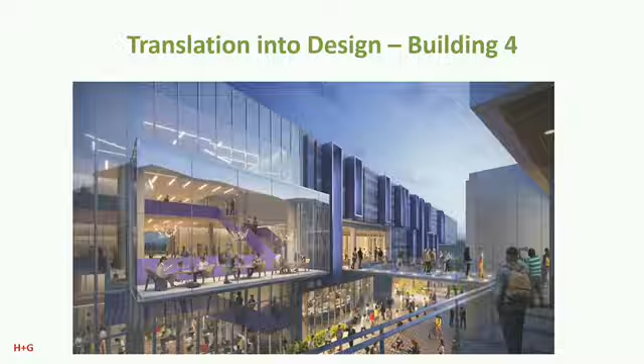I'd like to pause here and see if we've captured what your thoughts are on accessibility. We're going to spend the bulk of our day on the sustainability issues because of the technical nature of those, but if there's any discussion that the group would like to have, I'd encourage that now.

Yeah, and as you're considering that, I want to punctuate related to accessibility being deliberate in terms of an inclusion objective - specifically, student input and student surveys have gone into this consideration. What we heard from students as it relates to what they'd like to see in design are open, accessible, and that they feel comfortable. What we may feel comfortable in, they may not feel comfortable in. So there was a great deal uncovered, if you will, engaging the students' input as to how do they want to negotiate the campuses, what comfort level do they have, and what would they like to see as it relates to satisfying being open, being accessible, and for them feeling comfortable.

This is Teresa. Good morning. Okay, I'm sorry, no go ahead Teresa. I was going to ask a question, but you go ahead. Okay, no, I thank you for that.

Michael, Chancellor, I just had a quick question on that. You talked about it's been an inclusive approach and we've been getting feedback from students. Have we also tapped into those students that have special needs to make sure that this is equitable as well? Because one of the things I looked at is just visually, you see some of those areas are at different levels. So we want to make sure that if a student has some sort of special needs, they're able to feel included as well. Can you talk a little bit about how we reached out to those communities as well?

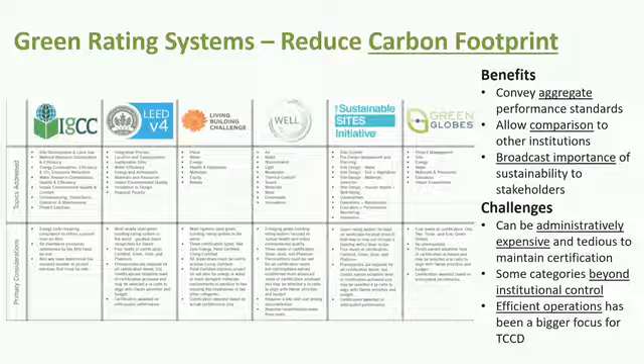I'll share with you that they divide the scorecard up, and we'll focus on LEED just as an example. All of them have varying usage, but they're divided up into these categories in terms of areas to focus on, and they're broken down. You can see there's an illustration that there's a bunch of different items under each one of those. What our team has been doing is using this to generate discussion around each topic.

And how is it that they're achieving those objectives in the decisions that we're collectively making as well, scoring ourselves to some degree. So as you can see, it's location and transportation, it's whether the site's sustainable, it's how we're dealing with water efficiency, usage of electricity and gas, indoor environmental quality, and so on and so forth. But it's just a framework for us to use that can be consistent across institutions, for us to learn more about ourselves and to make plans for how we're going to develop a particular site.

In addition to that, there's also a statutory framework. Back in 2007 was the first iteration of this, but statewide there was an effort to reduce energy consumption, focused on a narrow sliver of what sustainability means. They adopted rules for state agencies, including higher ed, and guidelines. I don't know that there's a penalty per se, but it was a goal of reducing our electricity consumption by 5% annually. I think to some degree that got the conversation started here at the college about how they were going to achieve that. They also had a couple of other minor requirements, including that we are required to post on the internet reports about our consumption of electricity, gas, and water.

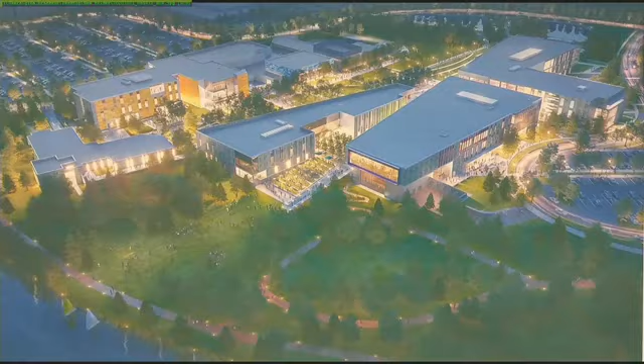Generally speaking, we're moving forward as a college, and we want to ensure this is not a cookie-cutter McDonald's with arches everywhere. There's a balance between what we need to standardize on from an efficiency and effectiveness standpoint, and what we need to focus on relating to the sense of a particular campus—the assets it has, where it is, the population it serves, and the programs at that campus. They differ from campus to campus, so it's a constant balancing act. Specific to your question, Ms. Ayala, there's a broader context to ensuring we retain and celebrate the differences in the campuses.

If I could, I'd just echo what Ms. Ayala is saying. Each of our campuses has some unique features. For example, our downtown campus can relate to the river, just like Northwest can relate to the lake and the environment it sits in.

You asked for a progress report on the presentations today. I'd observe that the board has been well aware and well informed in the past about the process to gather information that Mr. Black talked about—the 1,000, 2,000 meetings and so forth. I've never heard a detailed explanation of that process. I think that's the foundation everything is built on, so it might be beneficial to refresh the board's memory about how we started and what's been done in more detail.

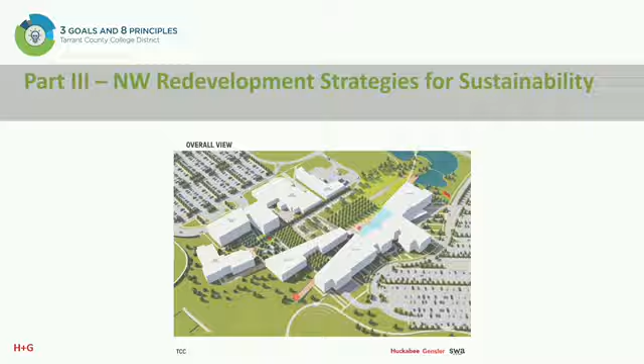So as we get into this, when we look at the campus, we look at the infrastructure that is there. And that was really our starting point - what needs to happen, what needs to be done. TCC and their guidelines and forward thoughts have really focused on what needs to be done to be energy efficient. So there are 3 buildings that got kept because of that: the central utility plant, the WHPE, which is an auditorium and gymnasium, and the WACB building, which is the conference room, or classroom conference room, at the end. So with that, sorry - we'll go to the next slide.

We did a very robust study in how the existing campus was maintained and what the condition of that is over the years. As Ms. Anthony said, the bricks were falling off. There are other things when you remove the bricks that you find, because there were cracks in the bricks, and over time things have, as you can see, deteriorated to a point where the infrastructure of that building was not in good enough condition to continue. We also looked at 21st century learning modules, flexibility - you want these new buildings to be there for 50 years.

And how does that really impact when you use the old structure? Some of the structural grids were not of the cadence for that flexibility.

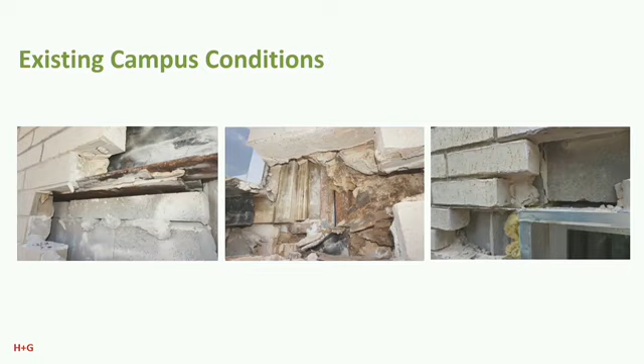As you can see, when we think about the existing campus, we also think about what we need to change in order to meet that 21st century learning, and the idea is this is a place for students not only to be recruited, but retained, as well as faculty and staff. We're creating environments for both faculty, staff, and students to thrive. When you see the infrastructure here, the campus and the outside spaces, there's not an inside-out relationship due to the scaffolding and things that had to be put in place.

And when you look at that, you can see some of the cracks in the brick and some of the different things in terms of water that has come into the building and those state of repairs. So we did evaluate each and every building and came back with a recommendation, and we have determined that in order to meet that 50-year mark and meet sustainability, you can see some of the things here really focus on the building envelope. We don't know what the EUI would be on this, but it'd probably be really high because of the inefficiencies that were built in the 70s and the degradation of that infrastructure.

You talked a lot about what has been done, and I just want to applaud ASG and Jack for his team. The white book here is all of the data by campus. It is what we use to start our initiation into the Northwest campus with all the campuses. And I want to say that we've embraced the level of commitment as an enterprise plan, which is all campuses.

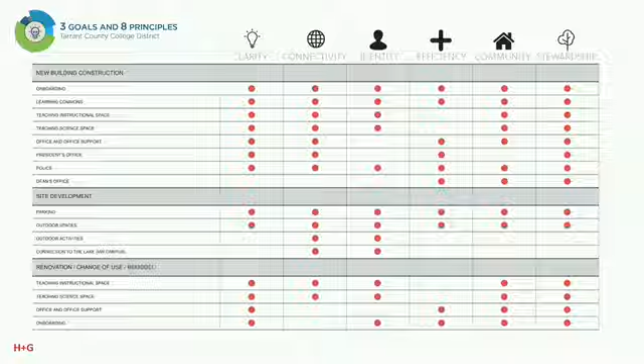So one of the things you heard earlier was design drivers, and these came out of lots and lots of meetings of listening to what the future state of TCCD would like to be, not only in its branding, but its campus and its site. At the top, you see the 6 design drivers, and the 3 bars are new building, renovated building, and other assets of that building and the space types. When you look at these, it's really important to understand all the different parts and pieces of it. The site's very important, and that's the middle bar there.

And the red dots represent how they relate to each one of those design drivers. As you saw in the 6 blue dots that were represented by these words, there are criteria that we use as our guidelines to take forth when we design this, that came from the different user groups that we met with.

Next slide, please. Let me ask a question: what does the plus sign represent? The plus sign represents—and I'm going to have to use my glasses, excuse me—it is efficiency.

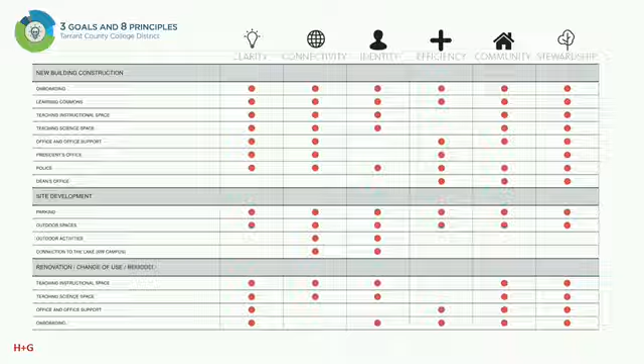We looked at not only energy use, but the use of daylight and how that came into the building. You'll see in some of our designs that we have a skylight at the top and openings throughout the floor to bring that natural light in to increase the wellness of those users. We looked at glare, which in this case could be off the lake or off different materials, but we were very aware of the materials we selected so we were reducing that energy negativity, dealing with that glare and heat.

We've also optimized the thermal barriers, which means we actually have barrier ratings that are higher than code minimum. A lot of that is due to Walt and his team's work in saying, here's what we need to be energy optimal—they're called R values, or resistance values for the walls. We'll talk about that here in a minute.

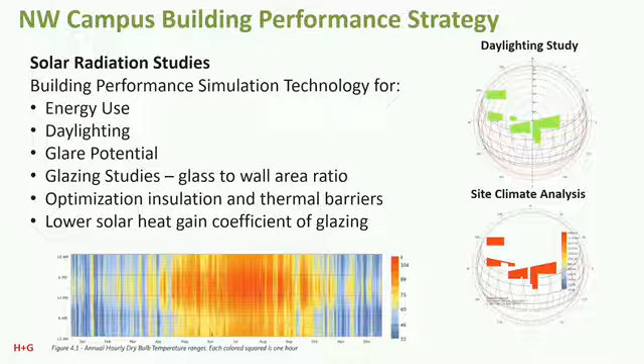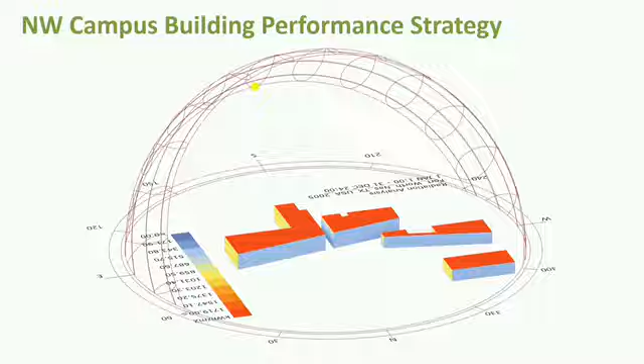So it hasn't been without lots of study, lots of rigorous ideas, using the tools of the industry today to orient the buildings on the site for optimal energy use, but also to create places that students want to be. We know students are more successful when they're retained on campus, meaning they want to be there. So there are lots of student success spaces throughout all the buildings and amenities that allow them to stay on campus. One of the first things we witnessed was students between classes actually going back out to their cars. If we could retain them on campus and have them gather and talk about things, we know that's where education really takes off.

Number 2 is the use of landscape and trees. We know students want to hang out, but we're surprised that even when it's hot, they hang out outside. So providing shading places for them, not only under the trees—letting the trees connect architecturally to the buildings, giving them further meaning—but places outside to hang out in the shade.

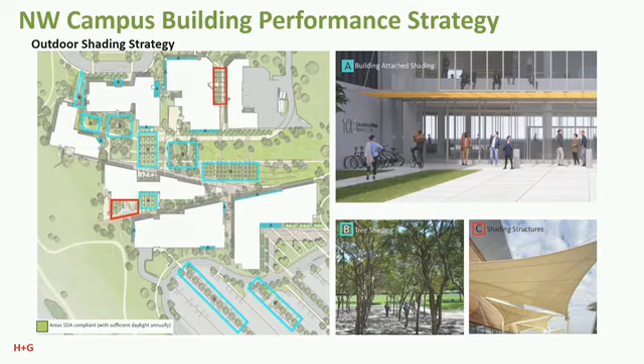As well as all the things we talked about, we really thought about how students and faculty use a campus, and how visitors come into that campus. So we think that building 2, the L-shaped building on the lower right-hand side, being that entry place where onboarding is, we need to provide visitor parking there, really enhancing that first experience to the campus. But then you have all the other parking. We know it's at worst about a 6-minute walk from the furthest place on campus to the center of campus, not to the first building you get to, but to the center of campus. So some of the things we've looked at are walkability and providing shade within the parking lot as you walk along. There are trees in the parking lot that cause it to be a much better place than it is today.

And I'll just take the last one in terms of efficiency. This is really where we're developing the facilities not only to be performance oriented, but to be student friendly, to provide spaces they want to be in, that they can embrace, so they're retained on campus. We know when they stay on campus, they're much more successful.

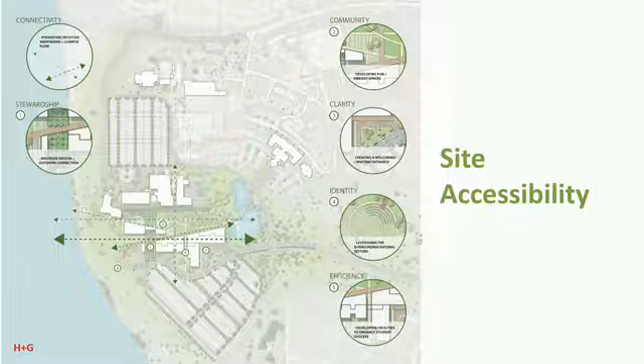So we talked a little bit about LEED and those characteristics of LEED environments. There are several steps to the LEED process, meaning you can have several levels of targets, from certified to silver to gold to platinum. What we know is your peer institutions have targeted silver because it is easier to achieve and a good return on investment for the institution.

So when you think about silver, it is not the bottom line, but it is where institutions find themselves, because when you get into gold and platinum, there are different kinds of metrics that make it more costly and possibly not a good advantage to the institution.

So those are things that we've studied, and we're using the LEED scorecard as a resiliency silver scorecard for things that create the roadmap for the Northwest campus. You could use this LEED scorecard as a checklist for every campus, and it allows you to have different attributes within it to still be sustainable. With the guidelines that TCC has done, it's really a robust model for where you're going in your future.

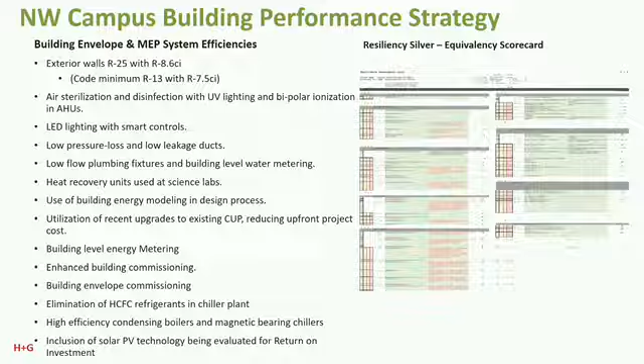One of the credits we got is because it's something you already do, and that's you buy green energy. So it's more encompassing than just the energy use. It is really a sustainable plan, as Susan said, recovering or refining that sustainable plan that you did years ago. And these are some of the things that we look forward to bringing to light as we get to review that plan as well. I think the question he's asking, or for me is, okay, silver is really good, I have no question about that. So what are we missing?

What's something that's more difficult at a higher level that you're not recommending we do? Well, something we could do—I can't read this, you can't read this. No, so I can't, I'm just asking. I know, the question, yeah.

So there's some things we could do from a site standpoint, like when you get runoff water you can do what's called a bioswale, which treats and contains that water. We've studied that, looked at the operational expenses, and said it's not a good return on investment. We've studied every single one of these and looked at how it might apply.

For instance, if you did a more costly mechanical system, you can get to that next level of points for that, but it's not a good return on investment. Does that make any sense?

So what you're saying is this chart is a combination of silver and a bunch of other things. Is this whole chart just silver?

Great question. So the chart is not prescriptive, it's all inclusive. You may have the 64 things that are on this—you just have to achieve the right amount of points to get silver, gold, platinum, or certified, and you can pick and choose. For instance, transportation, because you have a bus route on campus, that actually gets you a point, because you have public transportation. I feel like I'm not answering your question.

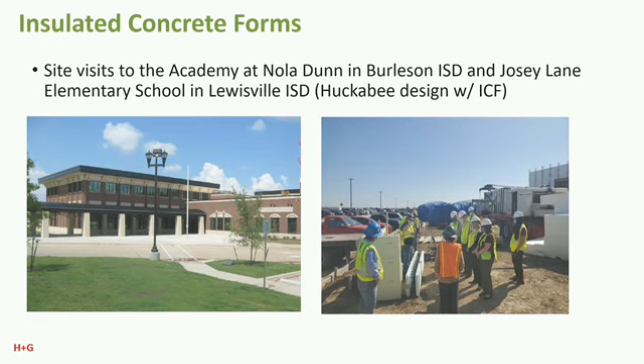I'd like to take some time to highlight a recent publication. This is ICF Builder Magazine. In November of 2019, Huckabee was highlighted in an article along with other firms, but this really speaks to the early stages of ICF and its development and use within the state of Texas and the country. I'll just cite this article and not dive into too many details, hopefully you can see it so I don't have to read it.

The first school to use ICF construction was actually built in Pennsylvania around 2005. There were a few other campuses around the country, and we caught wind of that early on and became an early adopter, if you will. You could probably argue that we're one of the largest proponents of ICF use, at least in the state of Texas, in the K through 12 industry for sure, with our experience.

We first dabbled in this in 2006, 2008. We started taking some tours, went out to Kentucky, visited a facility using the Nudura product, and spoke with the rep on our tours. We learned about that system, did some independent cost analysis, and thought it was a great solution for some of the heat we're dealing with in Texas.

The first school to utilize ICF in the state of Texas was Butterfield Elementary School in Sanger, which was a Huckabee school. It opened in 2008, so we've been using ICF for 12, 15 years now.

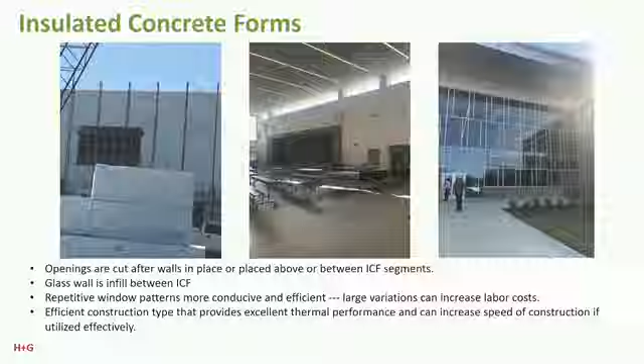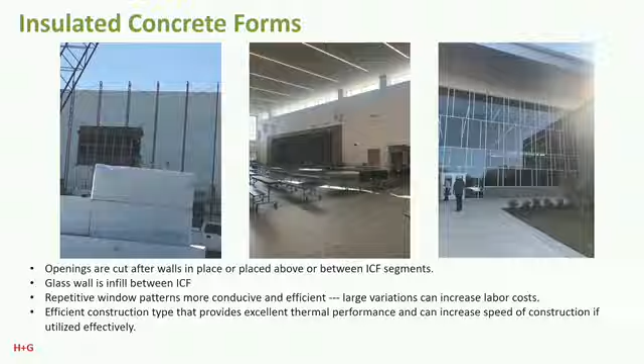And again, this is really just about the openness. So I want to talk to you about some of the codes, mentioning the fact that when we build with ICF construction, I now have a load-bearing wall.

And really that's the crux of my problem here, comparing to the Northwest campus, where we had to get away from that to go with a non-load-bearing wall so we can increase the amount of openness that we have on our facades. That is a particular concern with buildings that are more than one building on a site.

And the fire separation distance between buildings. Obviously, if I build a single building like a school on a site, I'm not too concerned about that fire separation distance because I may have several hundred feet to another edifice that I have to control for. In this particular campus, some of these buildings are as close as 30 feet away.

And there are some parameters that control the amount of opening that I have the ability to provide for you in that case. So a picture is worth 1,000 words here.

You remember from the site location, this is off of Josey Lane, a pretty busy thoroughfare. So what an elementary school really wants to do is turn to an inward perspective. We really want to control from the outdoors so that the kids are more focused on what they're learning. It's safer and a better sound attenuation from the busy traffic on the street. So it provides a number of positive benefits for us.

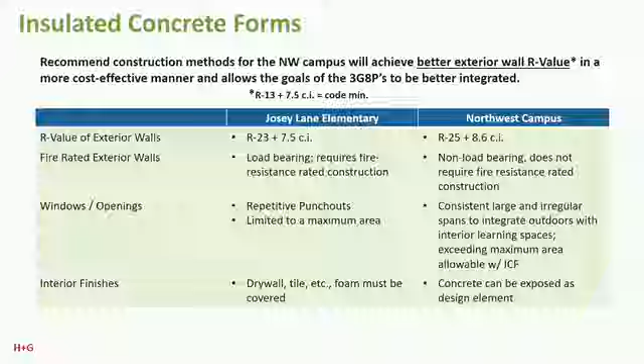And then lastly, some of the interior finishes. On the forms that you saw installed, the foam is on both sides. The foam on the outside, the CI, that's continuous insulation outside the building envelope, and that foam is flammable. That's okay, we can build assemblies with flammable materials, we just have to protect for them. That's part of the equation of controlling the openness to control flame spread. But it also means we have to cover the interior finishes of that material, so we have to add drywall, tile, those things.

Some of the images you'll see, if you take time to view those up there, show a lot of exposed concrete interior finishes, and we're able to express that more successfully without the ICF. So just wanted to give you a list of some of the variables and controls for why we are not recommending using ICF for the Northwest campus.

But again, I have nothing negative to say about the product. It's an excellent product and it achieves a lot of goals. We will continue to use it and be an advocate for it. As we've discussed with the other firms involved, we've not ruled out ICF as a solution for some of the other bond projects. Just want to share that. So anyone have any questions?

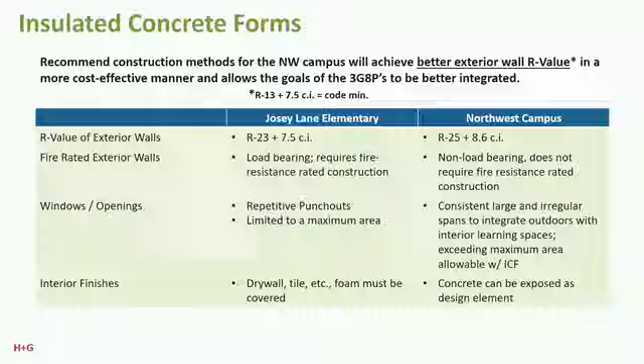I do. Yes, sir. Can you speak about ICF versus alternatives from an initial cost standpoint and a sustainability standpoint?

From the initial cost standpoint, it is more expensive to utilize ICF than traditional framing methods like cold form metal framing, et cetera. You have increased foundation depth and pier for the load of the exterior. It sometimes can achieve an expedited construction schedule, as I mentioned, and the time you save can sometimes offset the initial cost. It's a myriad of factors that weigh into that, but as far as initial upfront cost, it is slightly more expensive to do the ICF.

On sustainability, as you see from the R values, we can achieve comparable or better R values with other systems of construction. What we're using is a high density batt insulation in a composite system with, as Michael mentioned, cold form metal framing. On the exterior for the continuous insulation, we're utilizing mineral wool, which is non-combustible, so we don't have to worry about protecting for a fire resistance rating on the exterior of the wall.

It seems like one of the reasons why you're arguing against ICF is the amount of glass, the openness of the campus and so forth. Yes, sir. And it looks beautiful, but can you obtain the overall energy efficiency with all that glass? Yes, sir. We're using very sophisticated products for our fenestration, and they have embedded properties and tints that enable more reflectivity of the heat. Solar heat gain coefficient comes into play with glass, and it allows us to reflect more of the heat out while allowing the daylight in.

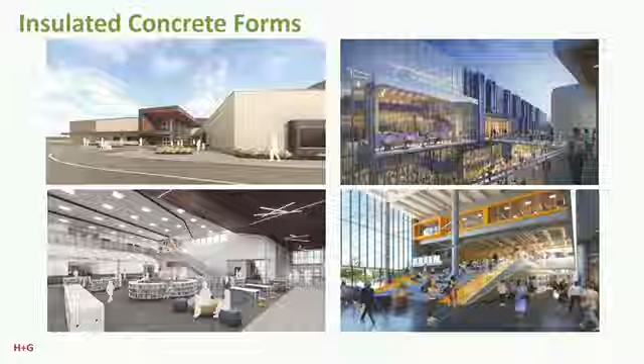Okay, thank you. You bet. Yes ma'am, have you also looked into the difference in insurance cost? I don't know if that's significant, but when you have that much glass versus a wall?

No, I think that's pretty negligible. But the one concern that Walter and his team did have was the maintenance and cleaning of all that glass, and the need to protect for that. So that is one factor we've looked at. We're going to have mechanical davits at the top of the building so people can come down and clean that glass for you.

Okay, thank you. Mr. Heath, one further question. I recall we had a presentation, some time back, about some challenges from a Wi-Fi and technology perspective, having these in a building with a lot of glass. Is there somebody who can talk about whether those are going to be challenges we might have to deal with, with this wall of glass?

I think we talked about it at one of the performing arts centers. That was one of the things our IT folks talked about. I'm sorry, I didn't understand. What was the question?

So previously we had a presentation about a facility, and one of the things that came up was that when you have a lot of glass in a building, there are some technology challenges from a Wi-Fi and access perspective. So I wondered if you could speak to that, or are we at the point where somebody could articulate if that's something we need to be concerned about?

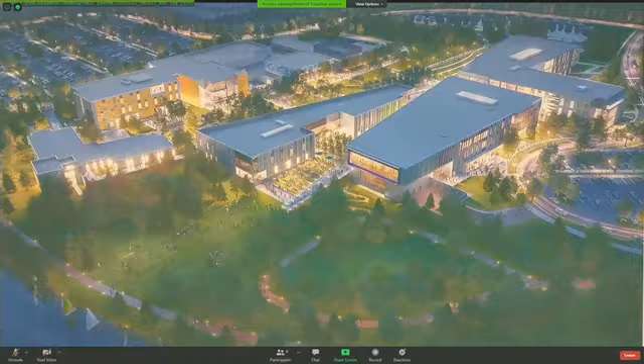It was input from the stakeholders we've been working with to drive us to the solution we're showing you now. If you look at the connectivity of buildings 2 and 4, for example, those open atriums — when you're standing in one, you'll see the space in the other building and the outdoor space between. So it becomes like an outdoor living room into the other space, and you're seeing what's going on in that other building.

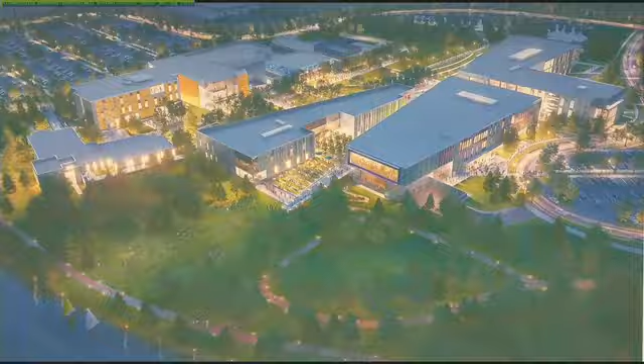So if you're a new student coming into building 2 and you're excited about science, you'll be able to look into a science lab and actually see what's going on. It's going to draw you to your interest and hopefully retain you on campus. That's the goal — really expressing that indoor-outdoor relationship in the buildings and the connectivity between each other that we're trying to solve.

I'll remind you that early on we discussed the stakeholder input, particularly as it relates to students. The three items that came out loud and clear with students were open, accessible, and comfortable. Those have been drivers in all the discussions, whether it's programs, services, staffing, layout, or finishes, whatever the case may be. So yes, those have been considerations throughout our whole planning process, whether it be construction or programs and services. All right, well, thank you very much.

So, Jean, I have a question for you. As part of this construction, is it also going to address the early college high school, is that correct? Yes. Susan, you'll have specifics on that.

Yes, actually one of the first buildings intended to be built will house the early college high school. We are having conversations with Fort Worth ISD right now about their participation in the cost of that finish out. I'll share that because it's an early building, it will also serve as swing space during construction, so it'll be several years before they actually occupy that space as we transition everyone into their permanent homes.

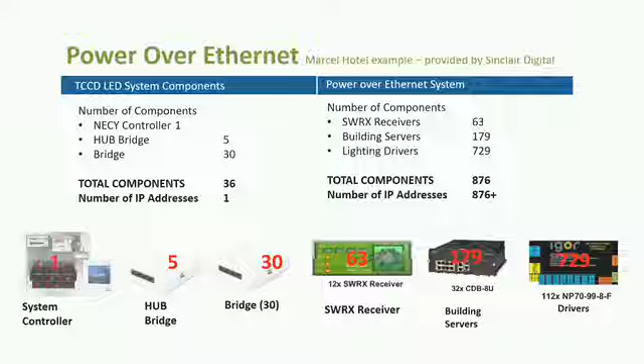Just a statement, based upon what you presented to us: it looks like, in regard to even maintaining the POE system, it could cost us a lot of people hours, so to speak, which isn't shown here in your presentation. But it looks like it would cost more to maintain with employees, am I right?

It's certainly probably more time. Okay, more money, thank you. Yeah, and I think it would take an engineer to really comment on some of these things, Walter, but there's not an engineer on the board, so we'll reserve judgment on that.

So here's what I'd like to put in a few more layperson's terms too, because I've spent a lot of time with different parties involved in this, as well as our partners here today, and with some groups that have been installing this to try to understand it. And the most fundamental thing I didn't get before we started this conversation is that both systems use LED lighting, which is where we've gotten a lot of efficiency to date.

However, it's about how the energy arrives and the fixtures you use, but we have the control system that Walt described in place that provides a lot of the benefit you heard. He mentioned occupancy sensing and daylight sensing, and those kinds of things that allow lights to go off when nobody's around, or at night, and that kind of thing.

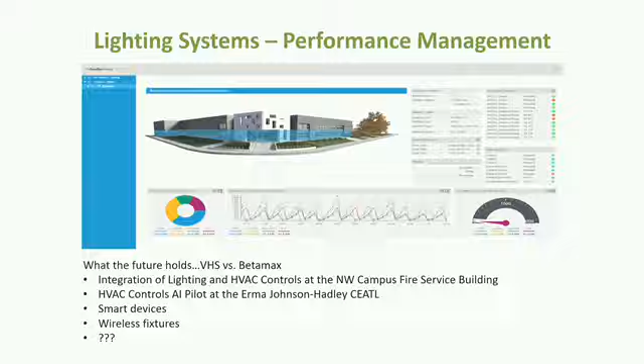However, we've also heard from you a desire to integrate it with curriculum and teaching tools as well. So, before I get to our suggestion, let me talk for a minute too.

We spent some time visiting with Clemson University, because a number of years ago they did probably one of the early higher-ed applications of this, and they had different objectives. I believe they had a funding partner that helped them with some of the installation as an objective. In addition, it was an innovation center that was highly tech-oriented, so it was a little different than a normal academic building in terms of the technology installed. And so they did POE lighting at that time.

We pressed pretty hard to understand what they perceive the benefits are. The guy we talked to was on the IT side of the fence, and so he was enthusiastic about the innovation of it all, the fact that their IT people could change out light bulbs and move light fixtures in a very flexible space that requires moving walls on a regular basis. He felt like it gave them more control than perhaps relying on their facilities folks.

It sounded like until recently they haven't been using a lot of the data as effectively or widely as perhaps they intended to, although I think they're trying to do more of that. And they have not expanded this technology to other building improvements they've done. So again, not conclusive, but instructive for us to try to understand from other folks' experience with that.